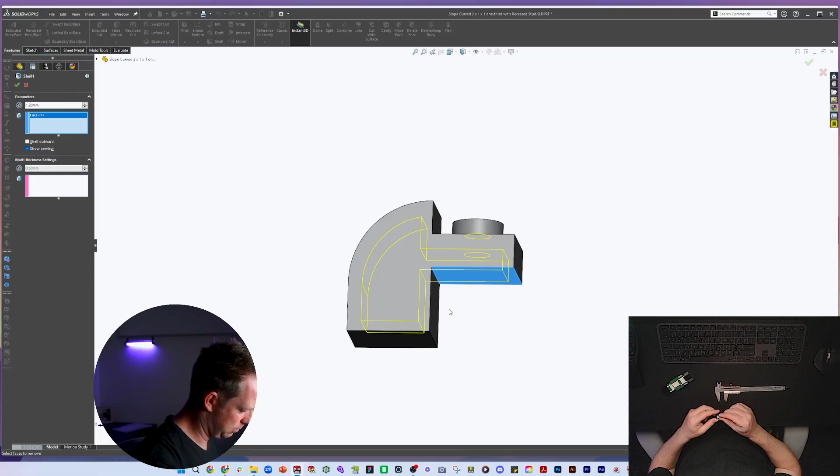This is a Lego part. Costs about 10 cents. If you're a parent like me, you've probably stood on one barefoot at some point. It took me 5 features to model it in SolidWorks, including one decision I want to talk about, because it's the kind of decision that separates people who genuinely understand SolidWorks from people who are just clicking through the menus.

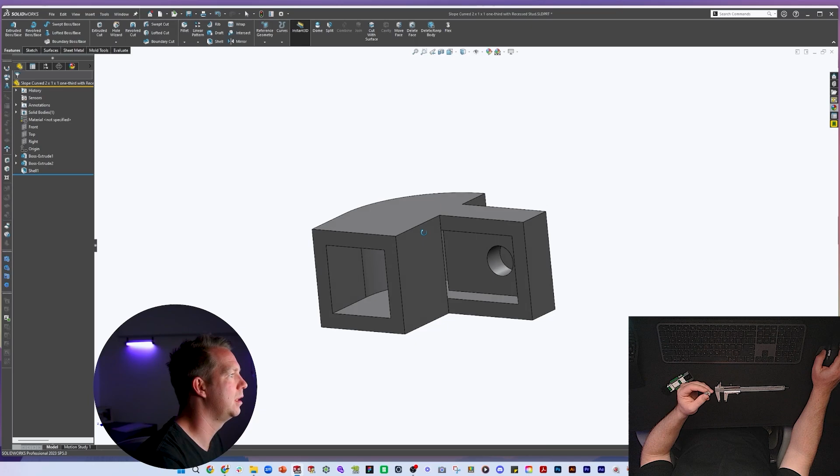When you look at the bottom of this part, the obvious approach is shell. Hollow it out in one hit. And that's actually what I did, but here's the catch. Shell removes more material than you want because there's a solid wall through part of the body that needs to stay. So you shell it, then you extrude back in to fill that section.

That's not a complicated sequence, but the thinking behind it, recognizing what the tool is doing, understanding why it's creating a problem, and patching it with a second operation, that's real-world SolidWorks problem solving in a 10-cent plastic brick. And that's not a one-off.

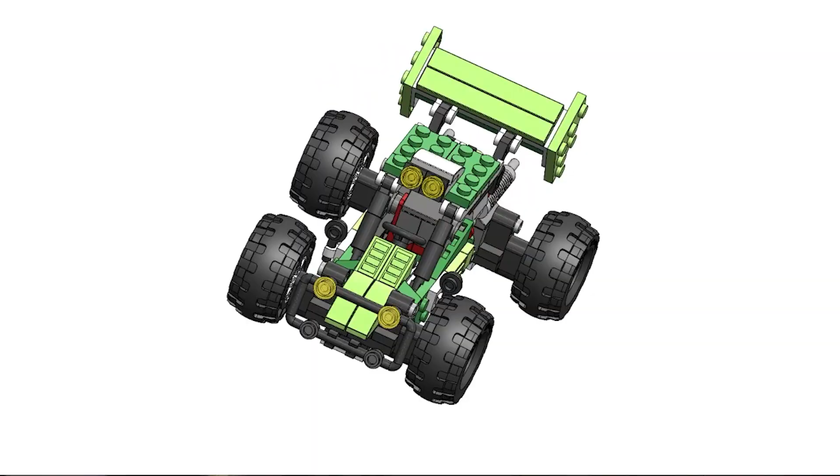Every single Lego part has something like this hiding inside it, which is why after 50 lessons and over 140 modeled parts, I'm more convinced than ever that Lego is one of the best practice materials available for learning SolidWorks. In this video, I'm going to make that case and show you exactly which skills you'd cover and where to start based on where you are right now.

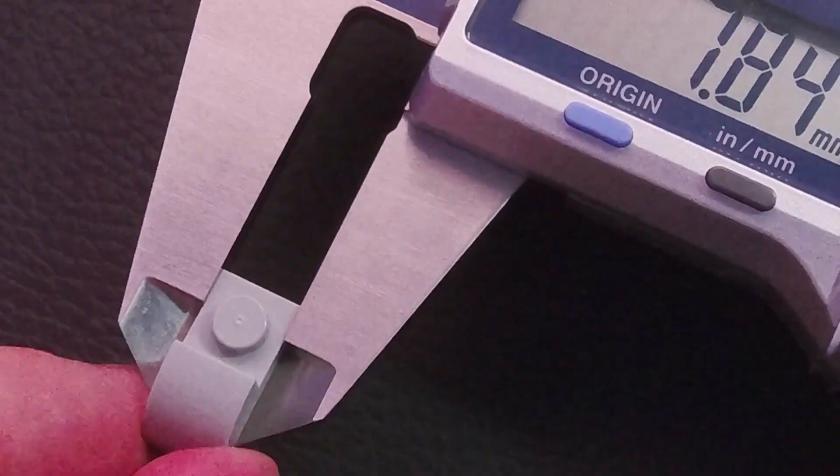So why Lego? Let me give you 3 reasons that I think actually matter. First, you can hold it in your hand. This is bigger than it sounds. When you're learning to model something, being able to rotate the physical object, look at it from underneath, measure it with calipers, that connection between the physical thing and the digital model makes abstract concepts concrete in a way that a random exercise just can't. You know what correct looks like because you can compare it directly.

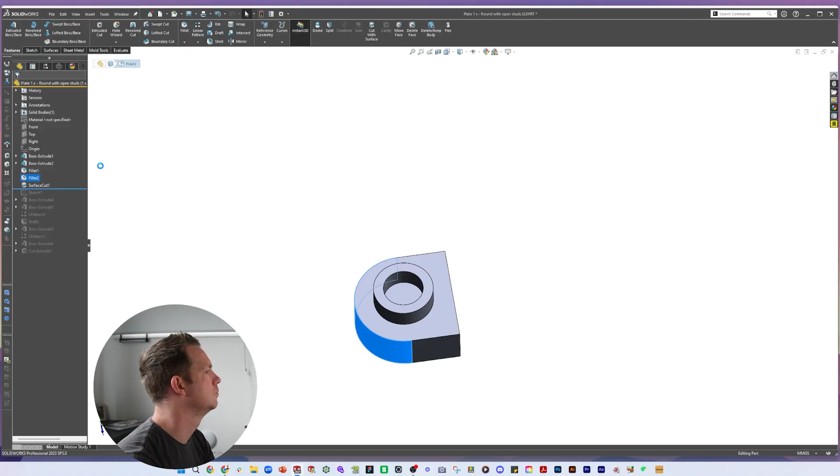Lego parts are manufactured to tight tolerances. The stud diameter, the wall thickness, the pitch, these are genuine engineering dimensions. When you model a part correctly, it fits with every other Lego part you've ever modeled. If your dimensions are wrong, you'll know immediately when you drop it into an assembly. That's instant feedback, which is exactly what you want when you're learning.

Third, and this is the one that surprised me most, every part has a unique modeling challenge inside it. A basic 2x2 plate looks trivially simple, but introduces you to symmetry, origins, and why where you place the sketch matters. The curved slope I just showed you: shell decisions and extrude patching.

The tire: revolve for the cross-section profile, circular pattern with 32 instances for the tread. How do you know it's 32? You count them on the physical part. That's reverse engineering. And that's what product designers do every day.

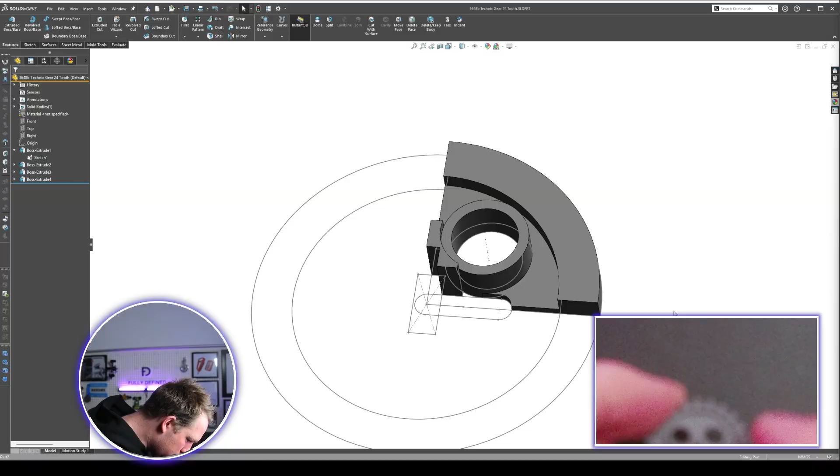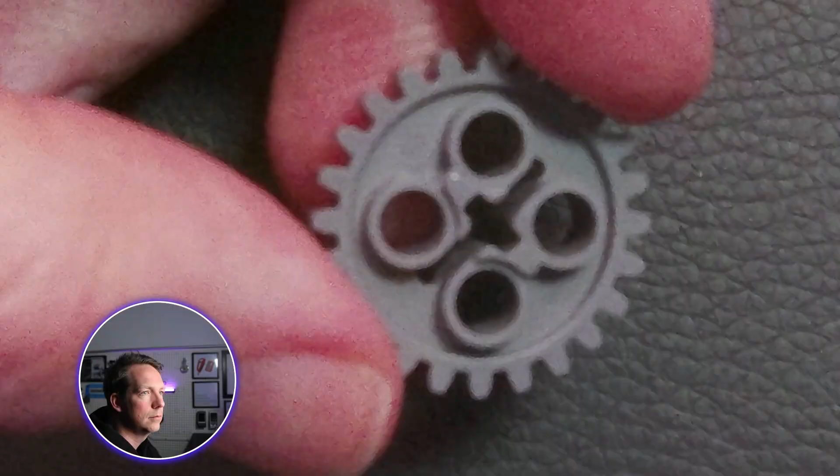A gear introduces sketch contours, selecting only the regions of a sketch you actually want to extrude, rather than the whole profile. That trips people up constantly. A steering wheel introduces thin features for the spokes, a single line that gets extruded with a defined thickness, rather than a closed profile. There is no such thing as a boring Lego part if you're paying attention.

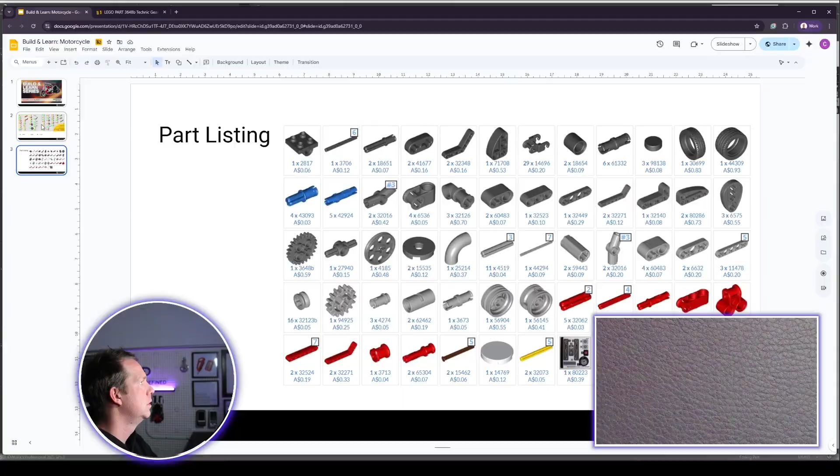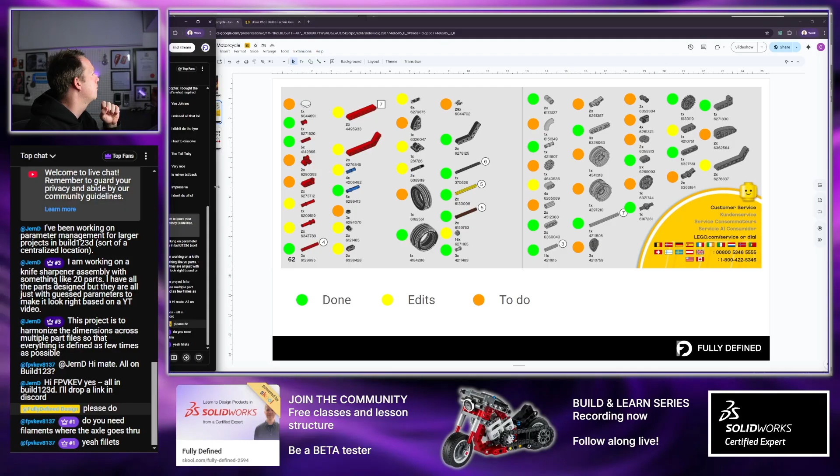And on top of all that, you can walk into a toy shop in any country and buy a Lego set. The barrier to entry is basically zero, which means the only thing standing between you and a structured, progressive practice library is about $20. I was convinced enough that I've live streamed the modeling, edited and split every session into individual lessons and catalogued the whole thing into a CAD library. Over 50 lessons, 140 parts, with plans for more.

So what does the library actually cover? Let me give you a few examples because I think they tell the story better than a list would. The tire from the Off-Road Buggy. Most people look at a tire and think revolve, done. But the feature tree on this part has a cut revolve, a surface cut, body operations, a second revolve, and a circular pattern on top of that. It's the most complex part in the entire project, and it's a tire.

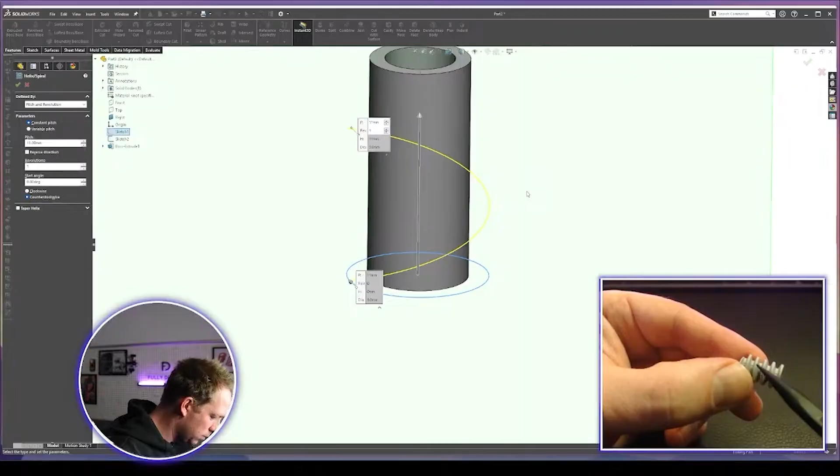The worm gear from the Volvo wheel loader. That thread geometry isn't extruded, it's swept along a helix. Helix and sweep are features most beginners haven't touched. And here they are in a part you could buy for 50 cents on BrickLink.

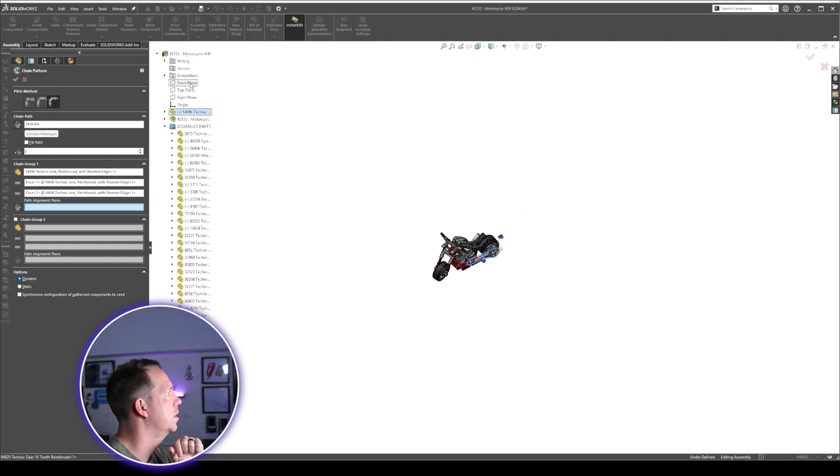And the chain from the motorcycle. That one uses a belt feature and a chain pattern, tools that feel firmly in professional territory. Most SolidWorks users go years without needing them. They're in here because the model demands them, not because I went looking for complexity. Those 3 parts alone cover a range that most SolidWorks courses would spread across multiple modules. And they're sitting inside sets you can buy at a toy shop.

The full picture, shell, mirror, sketch contours, cam mates, exploded views, and more is spread across 50 plus lessons in total. But you don't need to know all of that to get started, which brings me to where you should begin. So if you're convinced, or at least curious, here's how to find your way in.

If you're a beginner, start with the Off-Road Buggy. Lesson 1 is a flat 2x2 plate. By lesson 5, you're using shell and pattern features on a full brick. The ramp is gentle, but the skills are real. By the end of the series, you'll have a complete assembly and a solid foundation in the features that come up most often.

If you want to push your part modelling, the Volvo wheel loader has the most interesting geometry of the 3 series. The worm gear, the hinge cylinder with its draft feature, the curved side panel, the digger bucket. If you want the parts that make you think the hardest, start there.

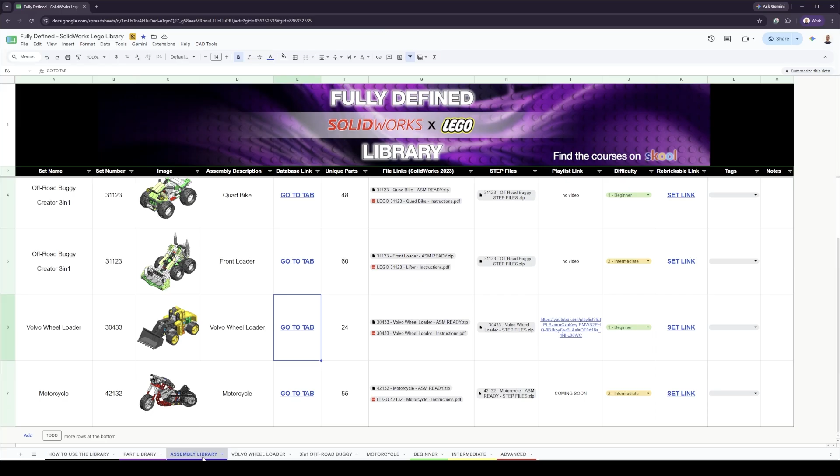If you want serious assembly work, the motorcycle is where the assembly skills get real. Cam mates, width mates, in-context design, chain component patterns. It's a more advanced project, and the techniques it covers translate directly to professional work.